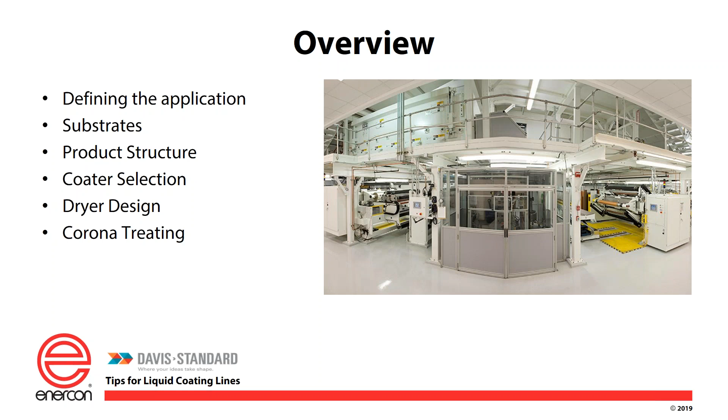In today's webinar, Lee and Tom will cover the key areas which can make or break a liquid coating line's success. They'll look at the importance of properly defining the application and understanding how the substrates and product structures influence equipment selection. We'll also look at the role of corona treating in ensuring coating success. With that, I'll pass it over to Lee, who will begin our presentation.

Good morning. For this presentation, to optimize for your application, we wanted to focus on the product structures, which is your application at the end. From these product structures, as we dissect through them, we'll determine the proper machinery and equipment to get you to the new lines you need today. In looking at the structures, we're going to be looking at the coatings, the surface treatments of the substrates, the drying, and the web handling.

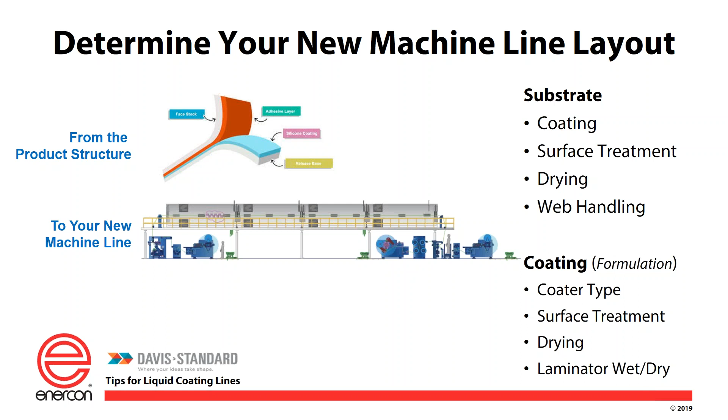Once we get to the coating parts of the structure, we're going to be looking at the coater types, surface treatment again for the coatings, drying of these coatings, and laminators, wet or dry. Next, here's a generic product structure.

For today, we started with just a basic label structure. So what we're going to look at are the substrates to be coated. Here you're seeing a face stock and a release liner. In what order are these webs to be coated?

We'll discuss that different webs can withstand different temperatures, different solutions, solvents, waters. So we want to figure out which is the best order to coat these and bring them through dryers. Based on that, what are the limitations of the different webs? Basically your temperatures or your tensions.

For instance, some of your film substrates, like a BOPP, will soften above 160 F, so we want to be very careful bringing those through the dryers. Tensions - let's talk about a softened BOPP. We can stretch it, or like a tissue, we can rip it easily. Boards, obviously, we can pull a lot more tension.

Now, what are the parameters for the web handling? For each web, we need again to look at your tensions. What are the roll diameters? What are the roll weights? That'll help us determine your unwinds and rewinds and the tension set points for the entire line.

And then what are the surface treatment level requirements? On these, do we corona treat them? Do we flame treat them? Are there no treatments? The actual treatment levels and such will be discussed by Tom later.

And then what are your formulations? We'll look at the different coating solutions that are applied. In this structure here, you're seeing an adhesive layer and a silicone layer, and we'll tear those apart. And then how do they get applied to the web? Those are the different types of coaters that we would select, and which one's the best for that particular application.

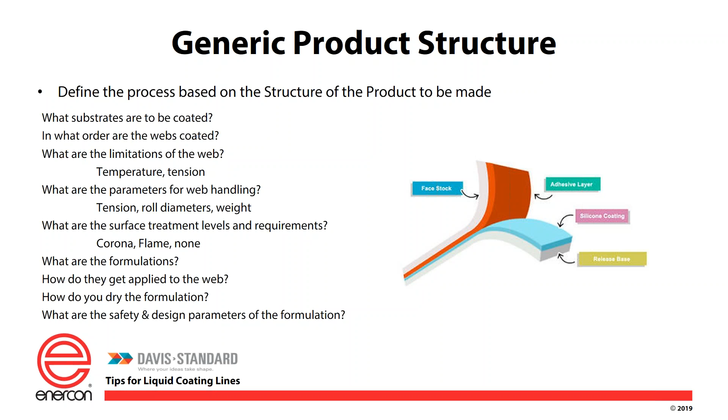And then we'll talk about how you dry these formulations. We have to understand the basics of the coatings and the substrates, and when they're combined, what it would take to get them through a drying process or a curing process. And at the end, what are the safety and design parameters of the formulations?

Here is the same product structure I showed you, and here's how we break it down and figure out how we're going to bring it through the machine line. First, we're going to use the release liner, which in this case we'll say is a film substrate. We'll call this the liner, and it will be the part that we'll be coating with the silicones.

So on the main unwind, we're putting the film, going to coating station number 1, we're going to apply a silicone, and then we're going to go through a dryer and dry or cure, depending on what stage of this formulation we're in, and create a silicone-coated substrate.

We'll make this a 2-pass line, so now we're going to take that coated substrate off the winder, put it back on the primary unwind again, and apply a laminating adhesive to the top of the silicone. In this case, we're going to laminate it to a paper web, which is your face stock.

The reason we're doing it in this order is the face stock is usually the expensive web that's used for the labels, the one you're going to be displaying, and you want to put that through as little stress as possible. Going through dryers, tensions, and laminations could stress these substrates.

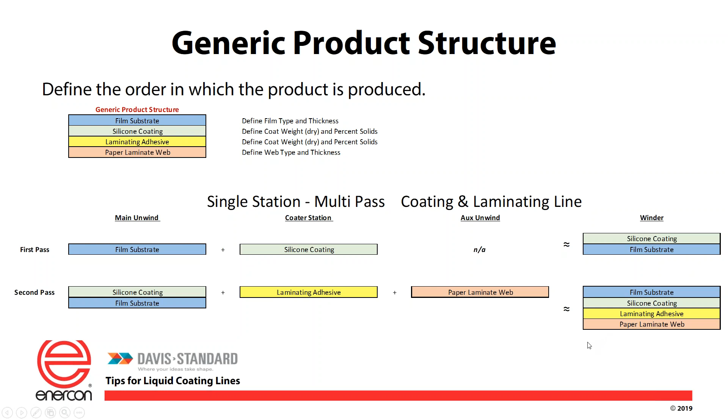So on that second pass, once we laminate it to this paper, you'll see on the primary winder we created that generic product structure: the substrate being a release liner, the silicone coating, then your laminating adhesive, and then your actual face stock, which in this case was a paper laminate web.

Now we'll start with coater selections. So with the silicones or with those adhesives, what we need to look at is the basic parameters around the requirements of each of these coatings.

At what line speed are you going to run these? Speed will determine tensions, style of coaters, length of dryers, and amount of temperature and dwell time in a dryer. Then we're going to look at what substrates.

What's the best coating application for a substrate? If it's film or paper, a gravure coater, a slot die coater, or a multiple transfer coater works great. However, if we chose a fabric or a tissue, you really don't want coaters that create back pressure, because it could penetrate through the web itself. So we need to isolate what your substrates are for each product.

And then what's the finish criteria? At the end, what is it you're looking for? Is this going to be an optically clear product like a window film? Or is this going to be a tape and label that's paper that you don't see through? Or a label that has a film with print on the back side? So we need to know what your finish criteria is to pick out the right equipment.

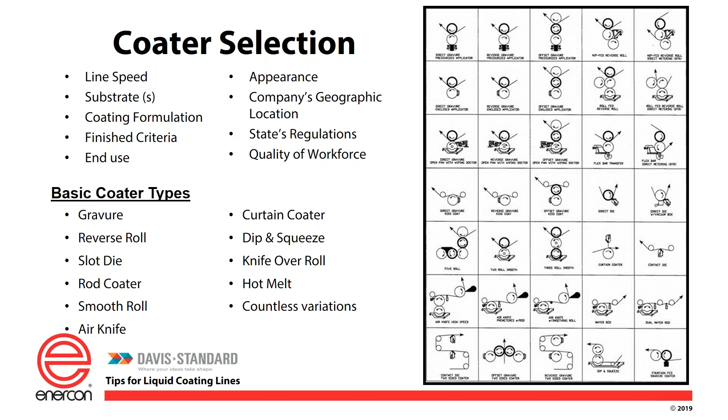On the coating formulation properties, all right, I mentioned to you a minute ago the silicones and the adhesives. What we look at there is what are their functionalities. We want to identify these. Silicones are typically a release coating. Adhesives, they're typically going to be a tacky, or it's going to stick to a web or hold a label to your products. We want to know what the end functionalities are to identify them.

And then what is the coat weight? How much coating are we applying to the substrate? Now, this is usually going to be either a wet or a dry number, and either or we need to know them both so that we know at the end on the winder what we're winding up.

During the drying process and application, what's that thickness going to be, and what are we putting on? We figure this wet film thickness out based on the solids content of that coating and the actual amount of coating you're asking for.

And then density will play a part in that. Most adhesives are slightly above a 1. Water is a 1 density. Adhesives are like a 1.1, slightly heavier. Whereas some solvents, if I'm using a solvent-based adhesive, are much less in weight. A density of 1 is 8 pounds to a gallon, 8.3, where adhesives are about 9.5 pounds. Some solvents can be as low as 6 to 7 or 8 pounds to the gallon. So density has a factor in that.

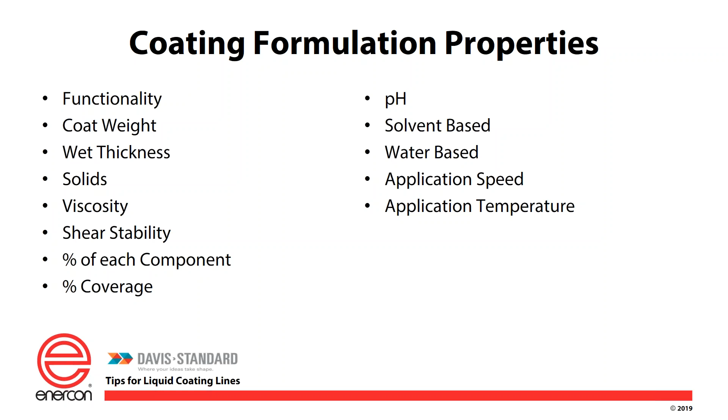You'll find, let's go back to the silicones, 100% solid thermal silicone will carry usually less than 1,000 centipoise in viscosities. But when you start putting additives for controlled release agents, or you get into the UVs where you're putting in some initiators, those viscosities tend to climb. And on a smooth roll coater like the 5-roll, the higher the viscosity, the higher the coat weight generally tends to be. We need more shearing actions. By increasing temperatures on those particular coatings, heating the rolls up, heating the bath up, we could actually lower the viscosities and get you a lower coat weight. So that's where we're at with your application temperatures.

You put it in, you run that coater day in and day out. However, if you're going to run multiple products on the same line, that requires different types of coater applications.

Whereas if this was a dedicated coater, we'd have to roll that gravure roll out with a maintenance crew, and you're down probably 45 minutes to an hour.

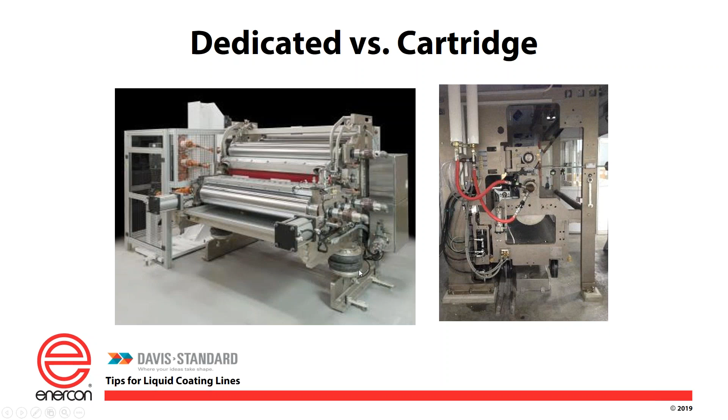We need to look at the absorbency. Paper, if it's clay coated, has little absorbency. If it's release coated with silicones, it has little absorbency. But if it's an open face kraft or an open board, your absorbency actually increases, which means as I apply a liquid coating to the surface, some of that liquid will migrate down into that substrate. That requires more energy in order to get it out during the drying process.

It also determines what type of coater. If it's very absorbent, like tissue is, we don't put a backup roll or a die against a roll with pressure. Something like this needs a very low backing pressure, like a tissue would be a kiss coat. So we would put 2 idlers. The tissue would go over a gravure roll with nothing pressing it down other than the idlers on both sides, or maybe a die in between those 2 idlers, applying the liquids to it.

Whereas film holds out great. It's got very low absorbency. Most films have zero absorbency, but yes, there are some hydrophilic films out there that do take on absorbency, and we need to know which ones those are, because that affects our drying processes.

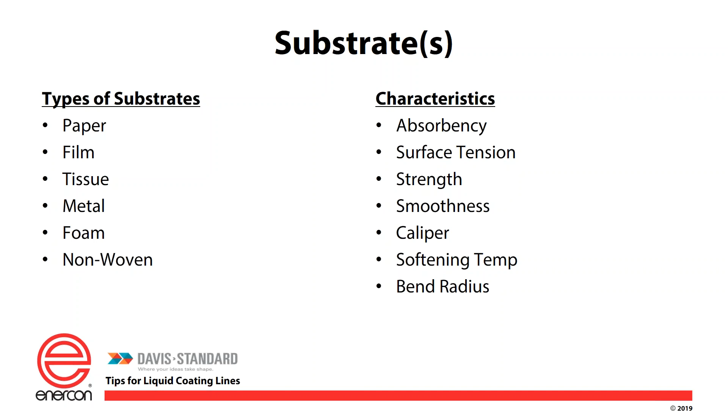Softening temperature - I've mentioned this quite a bit already, heating up different substrates and softening them to the point where they can be stretched. Bend radius again goes back to heavy board versus other substrates. With a heavier metal, we'd use a larger diameter to get the right bend radius so we don't crease the metal either.

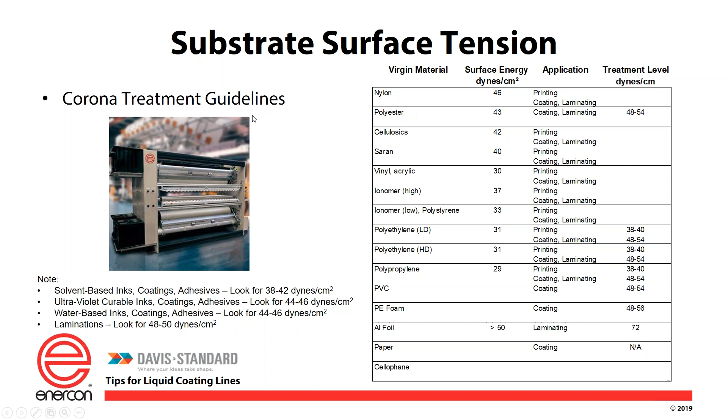What the differences would be - let's say on a film that's going to soften and become very frail, we want to support it, so we'd use a roll support dryer for that. Whereas with paper, I can use flotation, which allows me to apply heat from both sides more efficiently and aggressively, so I'd use a shorter dryer.

Coating formulations - again, we want to know what that formulation is so we can determine how much heat to apply and the evaporation rate to dry the product, turning it from liquid to gaseous form without disrupting the top or other layers. If you dry it too fast, you can get a skin formed on top, and the liquids underneath can't get out, so they boil, blister, and break through the surface. With something like that, you want to dry more from the bottom on a thicker coating than on top, and maybe even have a quiet zone with no drying on top.

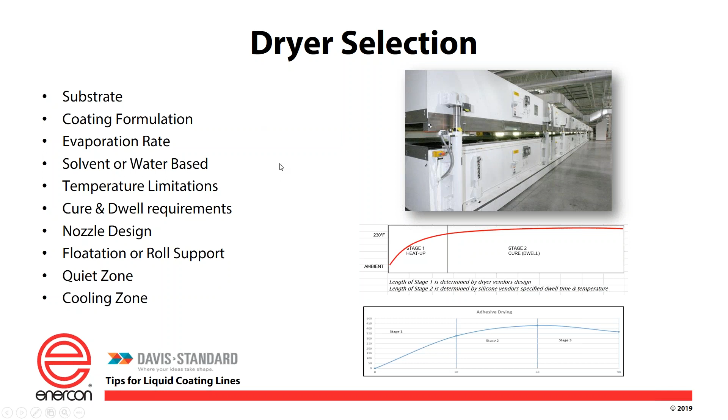The two charts there are the next two slides, so we'll move on to those and I'll explain them to you. In silicone, what you're looking at for a dryer is you need to heat the silicone up to a temperature, and you need to maintain that temperature for a period of time - that's your dwell length. Now, those numbers will be given to you by your silicone vendors for each product.

So if it's water-based or solvent-based, stage one is not only heat up, but also evaporation - we get rid of that. But most solvents or silicones today are going to be 100% solids in this talk. So we heat it up, let's say 230 degrees Fahrenheit, and we keep it at that for a dwell time.

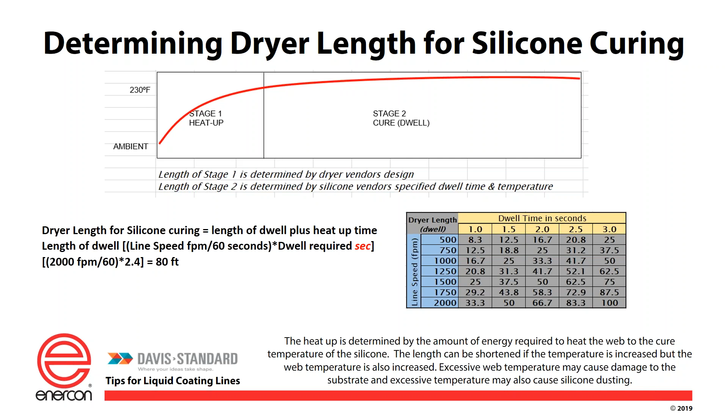Okay, next slide now is for an adhesive coater or other types of coatings, but in this application we're talking adhesives. Here I don't need to cure it - I need to get rid of the liquids.

I need to dry it down to a very finite dryness at the end, usually less than 1% moisture left in there. In stage 1, we're heating the web up and heating the coating to get to the point of evaporation.

As a liquid evaporates, it creates a cooling effect. So in stage 1, we can run enough temperature to create all this, actually higher than we can in stage 2, because stage 2 is drying with very little moisture left, so I don't have the same evaporative cooling. I have to run lower temperatures for that zone.

So stage 2 is where I have very little evaporative cooling, but I still have moisture to get rid of. Then stage 3 is where I do my final drying.

If I'm going from say 5% down to 1%, at this point I have no evaporative cooling, but I have to get that moisture out, and I can't boil the coating that's there. It'll blister in a different form, whereas in stage 1 it creates a skin when it boils first. Here I'm boiling this almost solid, which creates craters. So stage 3 is where I'm trying to get the final moisture out at a different temperature level.

So these are the two different styles of drying required for different coatings, which help us determine dryer lengths, dryer parameters such as nozzles or designs, and other units like that.

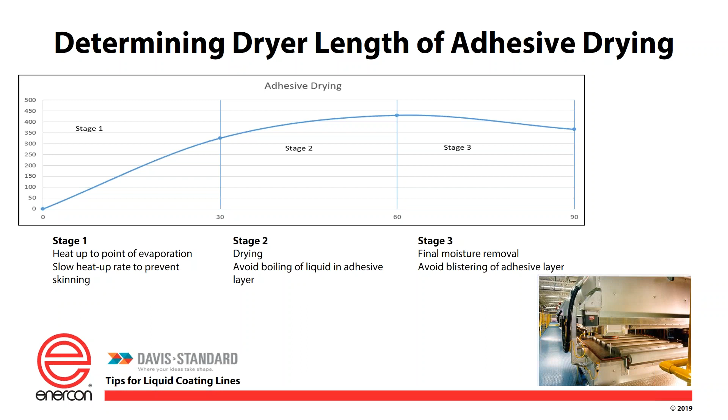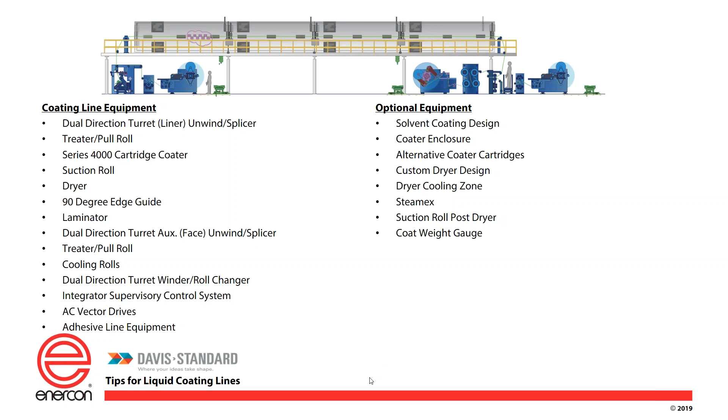Now, this is like an 80-20 rule. 80% of the time that's true. There's always an exception to the rule, so that's your other 20.

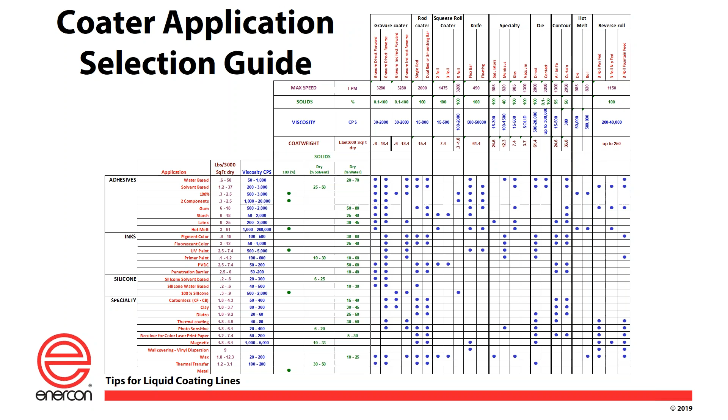We do solution coating and extrusion coating, so we can handle webs from the thinnest to the thickest, from plastics up to metals. We offer the total solution, which means not only will we engineer and design your machine for you, we will install it, start it up, train you, and maintain it over the years with our field service technology.

For any maintenance needs, you can give us a call. Tailored design - we don't offer just everyday cookie cutter equipment. We are known in the industry that when you come to us, we will tailor this machine to give you the best product for what your needs would be.

And global support - we are a worldwide corporation. We have manufacturing throughout the world. We have our service people stationed throughout the world, and we sell to the whole world economy. We're not just a U.S.-based company.

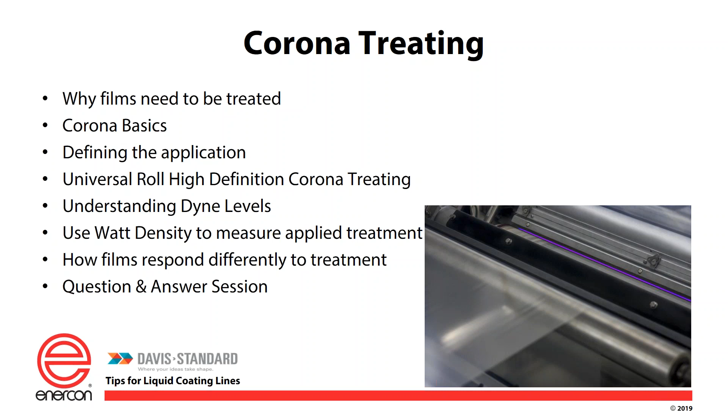So the number one reason why we're treating these films anyway is you guys have lazy film. The films you have are all low energy. So when you buy a polypropylene or a polyester or a polyethylene film, and you're trying to convert it, and like in Lee's case, we're trying to get a silicone coating to wet that surface, that pre-treated material, as Lee identified in an earlier slide, relative to these starting dyne levels, is just not adequate to allow that silicone coating, for example, to wet the surface.

Now why is that? Well, just a couple of reasons. Number one, it's simply a low energy surface to start with, meaning there's no polarity on that surface. It's just a very neutral surface. But then we have other problems, right?

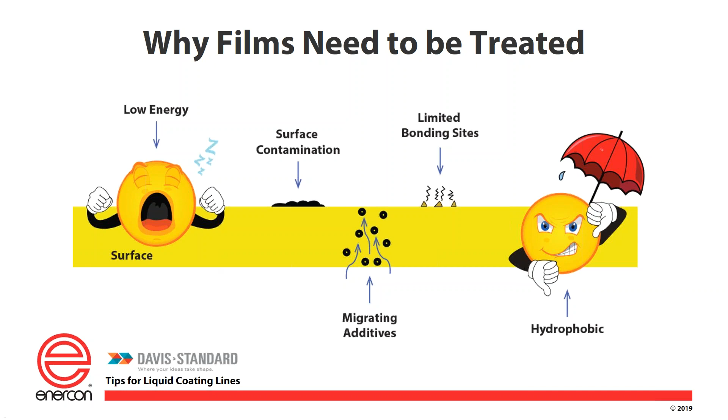We have surface contamination that might be as a result of migrating additives, slip additives, anti-blocks, possibly colors, whatever it is. Some things maybe post-consumer - maybe it's a post-consumer product, there's 30% recycled material in there, and within the scope of that, there were some additives within those categories that now are sitting on the surface, which limits the surface's ability to bond and limit the surface's ability to wet the liquid. So the surface treater, corona treaters or flame treaters, they're there to correct for all these issues.

So this is kind of what this slide is showing, right? We're showing a corona treater station and your web with all this baggage - we've got additives, we've got post-consumer, we've got age. The film you're running might have been sitting in a warehouse for any number of months or maybe even a year before it's being converted. So all that baggage that's on that film, we've got to manage that. Somehow that's got to be addressed before it gets into the coating head.

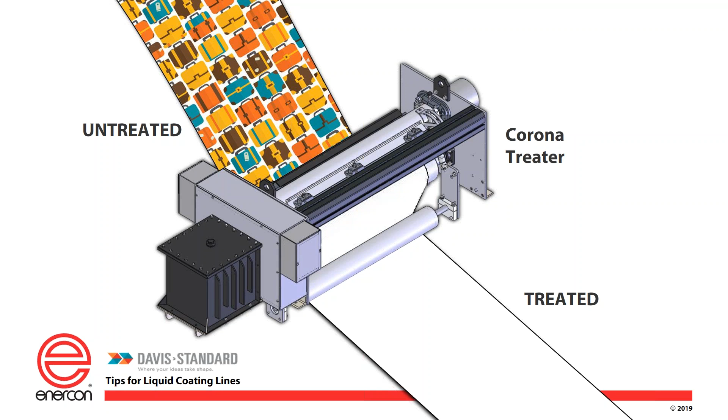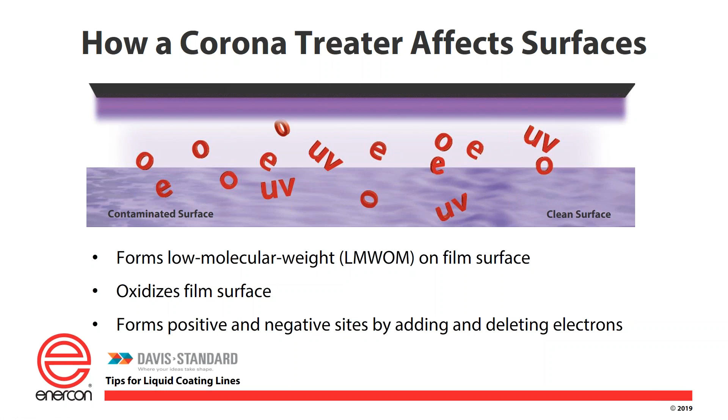So really what happens here is we have all these low molecular weight materials on the surface of the material, and the corona treater takes that material - we oxidize that, we put oxygen into the surface, we go ahead and form these positive and negative sites by adding and deleting electrons in the corona field. And that cleans the surface, of course, get rid of some of those migratory agents that are on there. And when we do all that, we end up now with a surface that goes from a non-polar surface to a polar surface, one that was kind of dirty and not suitable for silicone coating in this case, but now is. The corona treater is doing its job - it's cleaning and functionalizing that surface so that the coating process does what it's supposed to do.

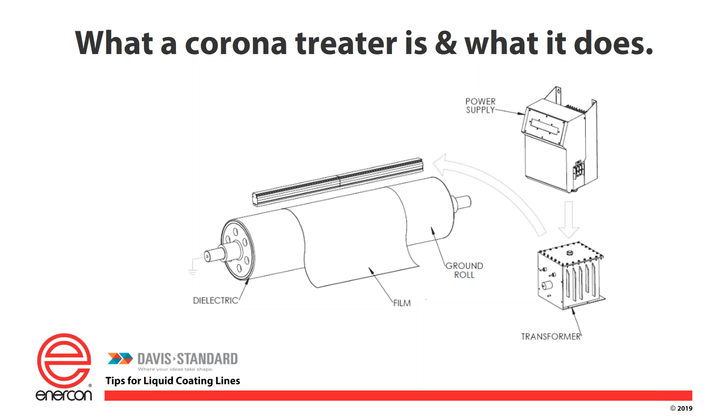For example, in a propylene material, a pre-treated polypropylene, you might get that material coming from the extruder at maybe 36 dynes. Then the corona treater, after that 36 dyne material passes through it, can increase the surface energy to maybe 40 or 42 dynes, depending on various conditions. But that's really what the corona treater is doing, is ionizing air. That ionized air then creates a functional surface on what otherwise is a non-functional film.

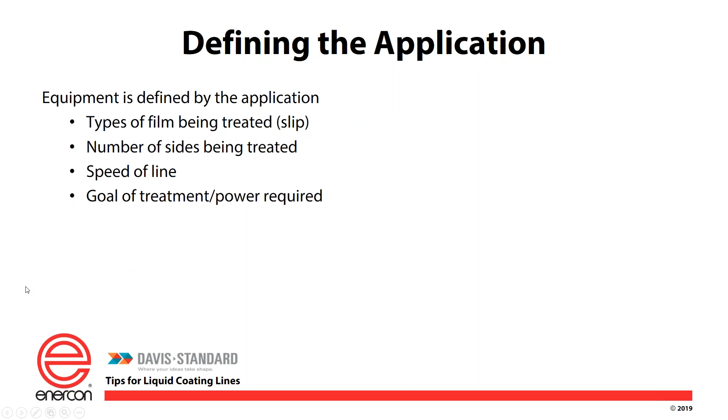We need to know how fast the treater has got to accept the film going through it for treatment. We need to know what the goal is. Are we treating this simply to get some material off so the surface energy comes up for a solvent coating, or are we doing it for a water-based coating? Are we doing it for an energy-cured coating, like a UV coating? These are all the questions you hear from us when you contact us for a quote. That's why we're asking them. We need to get an understanding and define the application a bit so we know whether the treater is going to be a 5 kilowatt treater or a 50 kilowatt treater.

As a lot of you know, there are a lot of different versions of treaters out there, it seems like everything else, right? We used to just have two choices when you ordered a coffee. Did you want it with cream and sugar, or did you want it black? Well, today, like everything else, corona treaters have grown a bit in category. So there are different types of corona treaters used for different types of applications.

I won't get into every little nuance here because we're focusing on the systems typically used in our example, a silicone coating application. So I'll focus there. In that application, and many similar, these universal high definition treaters tend to be the ones that people choose. So what are they? What makes something a universal high definition treater?

There's two main things. Number one, the electrode is actually ceramic. So the electrodes within the electrode assembly are a ceramic insulated electrode. They're designed to be used in various applications. They can treat standard web, paper, poly, laminates, what have you. But they can also be used to treat conductive substrates. So if you're running a product that's, say, a metallized polyester on one side, and you're going to marry that, or coat that surface, this universal high definition treater can certainly do that. So it has a lot of capability and flexibility.

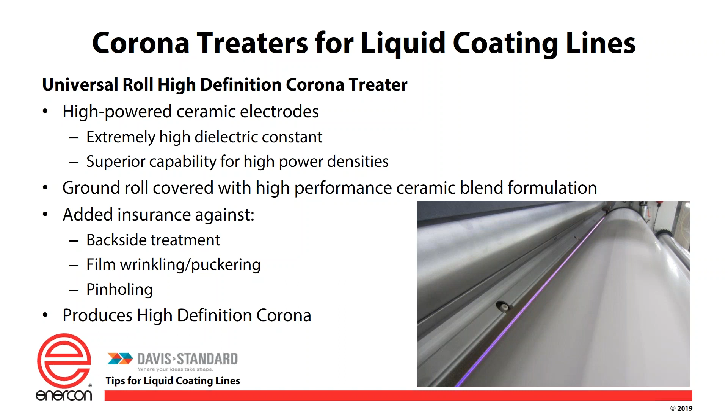So how do you measure the effectiveness of treatment? You could do a webinar easily just on this topic alone. So on this slide I ran everything together and gave you the high-level approaches. The number one message I want to leave with you in this section, the thing I don't want you to forget: dyne testing, which we all use and most of us are quite familiar with, is the industry's standard method for determining the effectiveness of the treater.

So to measure the surface energy of a film with a dyne test, we can do it with pens, with sterile cotton tip swabs, or with a drawdown or Meyer rod method. In our opinion, dyne pens are best used for initial testing.

Let's go all the way back—think with me for a minute—to the early slide in Lee's presentation where he had that list of materials with generalized dyne numbers for the coating. Picture yourself as an operator on a coating line. Your inventory group just brought a bunch of rolls over to load onto the machine—let's say they're rolls of polypropylene film.

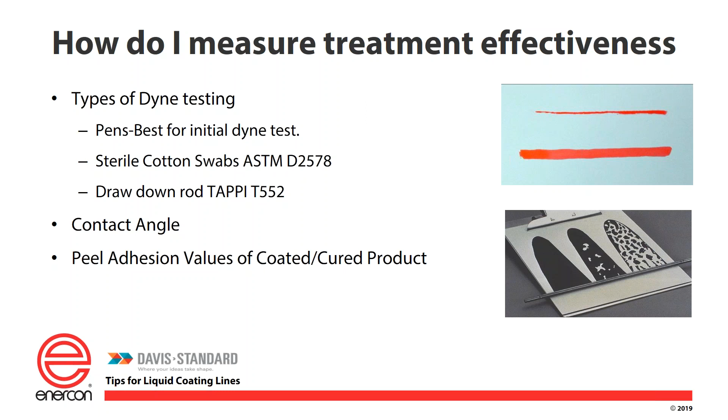So here's my controversial slide of the day. Dyne levels do not guarantee adhesion. I just came back from a few days visiting with customers, and I must have mentioned this at least in 3 different meetings this week. It's a little counterintuitive in our industry, because just by happenstance, we take a substrate that's 36 dynes, treat it to 40 dynes, put some silicone on it, do a peel adhesion test, and hey, look at it, it's great, it works. And everybody thinks 40 dynes equals this great adhesion.

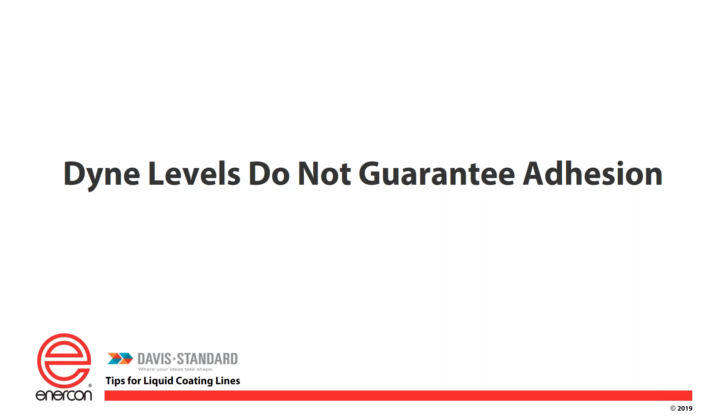Well, not necessarily, right? Dyne numbers are measurements of wetting - adhesion is not that. It's fortuitous and quite helpful to us that they tend to follow along in a step-by-step manner. But the truth is, many of you listening now know this on your own - you've had the experience where you treated the substrate, applied the ink or coating or adhesive, and didn't get the result you want. Yet you may have recorded the dyne number that in the past looked good. So at that standard you'd think, I don't know what's going on here, something's wrong - why did I get this dyne number and now I don't get the result I want?

So what do you look at when that happens? You're looking at what kind of output power did you have, was your watt density where you needed it to be, how am I controlling this treater? These two methods are the most common. You can control the treater by simply walking up to the controller and raising or lowering the kilowatt output. Many of you do this - you know the old saying, raw power, right? If 1 kilowatt is good, 10 kilowatts has got to be better.

Sometimes that happens, but it's kind of the rare case. Really what you want to do is suit the output power to the material. Let me give an extreme example: let's say we're running polyester film on the silicone coater, very thin gauge film, and maybe we're in a mode where we're running slower. Maybe the job requires that for whatever reason, so line speed is a bit slower than normal. But we decide that even at the slower line speed, we're going to give the treater output 100%.

What happens there is you'll find many times some odd things can go on with the web. The web gets into the treater, it's running at a lower speed, gets a lot of dwell time, a lot of power, and now the web starts doing odd things. It can pucker, it can wrinkle, it can get a big static buildup, things of this nature. And then when the web exits the treater, more problems happen. The coating doesn't look right, it doesn't wet properly, maybe it's got an orangey peel look or something. Something in that process is not working.

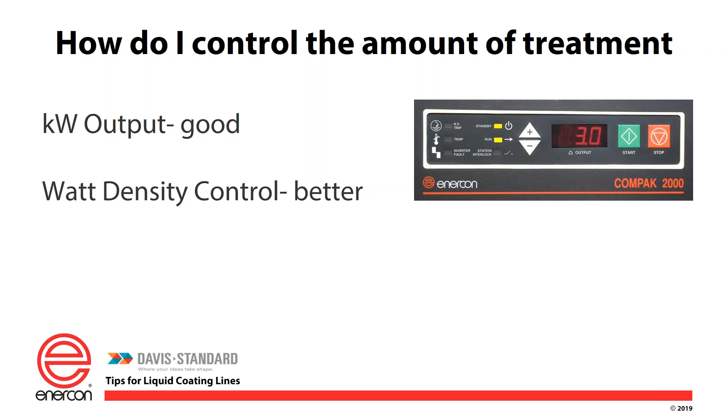And the watt density is something we're going to go into right now. So really what we're looking at is we take into account the width of the web, the width of the electrode if it's a fixed width electrode, the line speed, the number of sides we're treating, and we calculate all this out and come up with the amount of energy based on the line speed and the web width - so how much power over how many feet squared of material through the treater per minute.

So you might be asking, well that sounds great, Tom, but so what? Well, this is how all corona treaters are sized. I don't care if the corona treater is a ceramic electrode corona treater, a bare-roll corona treater, a metal electrode corona treater, or an atmospheric plasma treater - these are all sized in the same fashion, done the same way.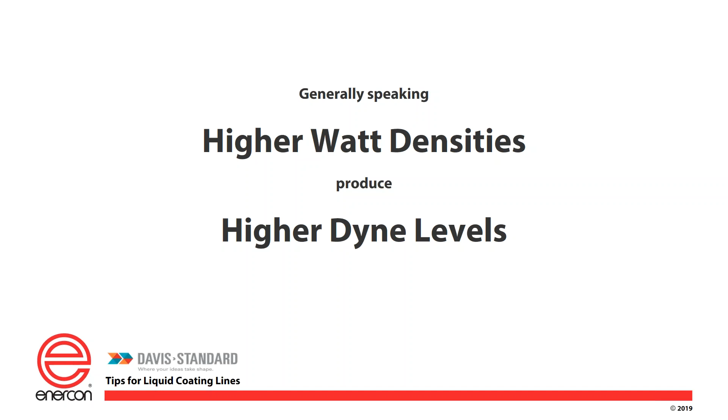Generally speaking, higher watt densities produce higher dyne numbers. We've all seen this, right? We have practical experience that tells us this. Maybe the data on this slide should say, generally speaking, higher watt density produces higher dyne levels, and underneath you say, duh, right? That's what everybody's thinking. But really, that's not always the case. Your own experience shows this. So let's go on to the next slide and dig into this a little bit.

You can't use a watt density to predict your dyne levels. Many of you want a closed loop system that says when the corona treater's on and I run at a watt density of 2, I'm gonna get 42 dynes. Believe me, if I could do that for you, I would. It's not a question of equipment or technology that doesn't make that happen. The overall reason it doesn't happen is the material.

Over time, somehow the material in this equation - the polyester, polypropylene, polyethylene, styrene, whatever it is - kind of leaves our thoughts. We kind of set that aside, like wallpaper. The material's got to be there. In our example, we're making silicone-coated product, so the material's got to be there. We've got to coat something, so we kind of set that aside.

Sometimes we set aside the fact that the material changes. We might be coating one type of film one day, and the next day we're still coating but a different type of material, and we assume they're all the same. So if I ran 2 watt density yesterday, I should be able to run 2 watt density today, and predict the dyne level is going to be equal. That's not really the case. Next slide.

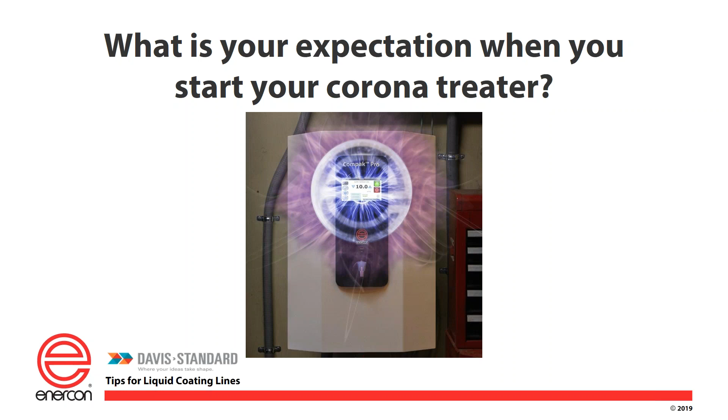So what is your expectation? When you turn your corona treater on, do you just expect it to magically give you this dyne number? Because if that's your expectation, there are going to be times you're not going to be happy. Do you expect to see that same result every time you run the film through it? Again, if you do, your expectation may not be met. So why is that?

There are all kinds of reasons, but really the main reason is the film structure and what's going on the surface. Polypropylenes don't treat the same as polyethylenes, that don't treat the same as styrenics, that don't treat the same as polyesters or nylon. And again, we know this.

Let me give you a drastic example. On one end of the scale, I have a polyester film. Going back to the beginning of the presentation and Lee's slide, that polyester film came to us at probably 38 or 49 without any further treatment. On the other end of the scale, if I take a polypropylene of the same gauge, same width - from 10 feet they look the same - that polypropylene isn't anywhere near 49. Just by that reality alone, is it right to expect that at the same watt density, you're going to end up at the same point?

That's just not going to happen. The dyne level you start with matters, and the substrate matters - the time the substrate's been around, how old is it, what additives are in there, is there any other surface contamination in there? So many times on converting equipment particularly, you hear this.

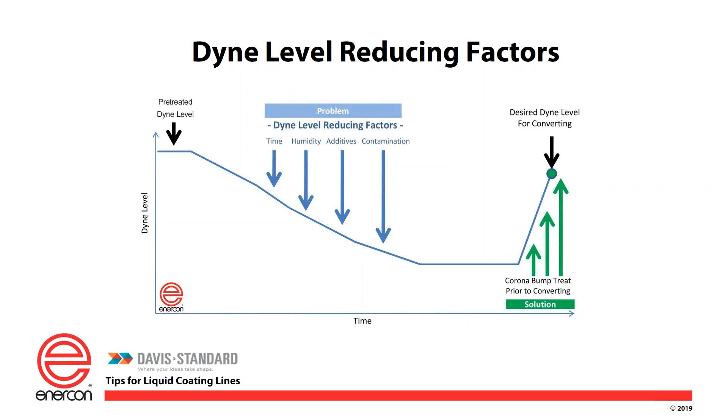So if you do that and you bump treat before you coat it - and we had his line schematic showing a couple treaters in there - that's really what he's doing. He's unwinding those films and bump treating them prior to the coating process. Next slide.

So here's a great example of what I was referring to. We have 3 different films: a pre-treated polypropylene, a polyester, and a polystyrene. We treated them all exactly the same, with the exact same treater, at the same power, a 1.1 watt density.

So what results did we get? On the pre-treated polypropylene, we didn't get much, maybe 38 dynes or something like that. On the polyester, look at that. At a watt density of 1.1, that's a big winner by the dyne category. We got 45 dynes on the polyester. And the overall winner altogether in the dyne race here is polystyrene, where we went from the low 30s up to 60 dynes.

So if all we were focused on was just this dyne number, like we're racing towards dynes, then clearly the winner here is polystyrene. But isn't it interesting that we got this great number, but the treater didn't change? The treater is the exact same device running at the exact same power. Let me ask you guys out there, what in that example changed? And of course, the answer is the film changed. So different films treat differently.

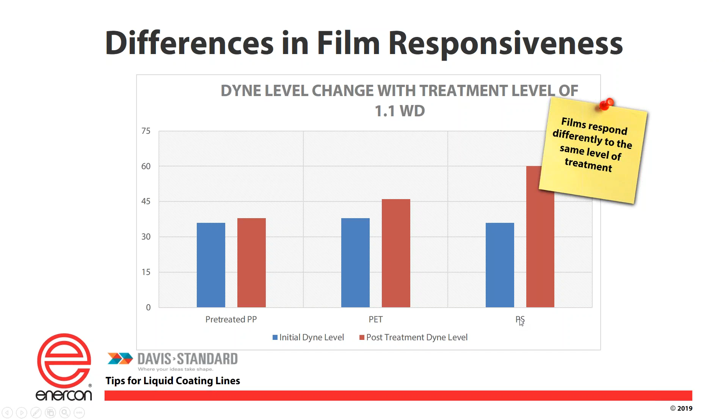Again, really a good example here where we had BOPP versus polypropylene, and you apply different watt densities and you don't get the same dyne level results. It's really the same category. Depending on the film structure, additive loading, age, and so forth, some films respond better to more aggressive amounts of corona treatment. In this particular case, a watt density of 2.2 gave us one result with one film, and a different result with another film.

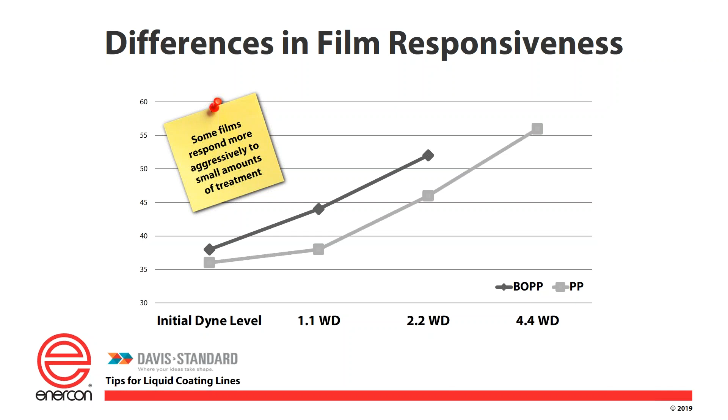And as I go up in power here, at a watt density of almost 4.5, I still ended up getting some benefit. But on the other film, I got nothing — it sort of plateaued out. So the film, folks, makes a huge difference in terms of the ability for you to convert it accurately and effectively. Next slide.

Looking here at a low-density polyethylene and the dyne level change relative to the increase in watt density. Now, the purpose of this slide is interesting in that we have this conversation all the time, and Lee might probably chuckle a little bit at this. Sometimes when we go through this analysis process and we're collecting data from you on application, the comment will come back to us where somebody says, well, I need 56 dynes on this randomized list of materials, or I need 50 dynes or something like that. And where that comes from, I'm not exactly sure.

I'm not aware, generally speaking, of any solutionized coatings or inks, water or solvent based, that are formulated in a manner that requires the substrate to be anywhere near that dyne number. Most of the time, those dyne numbers are asked for because people are making an assumption that they're going to store this stuff, and then in 6 months it's going to be high enough yet that they'll be able to still coat it or print it. There's a lot of trouble with that thinking, least of which is the fact that...

these things don't all decay at the same rate. Sometimes they drop very fast, sometimes they drop very slow. It's like playing Russian roulette with that. You just don't know what's going to happen over time, okay? But even worse than that is it costs you guys a lot of money.

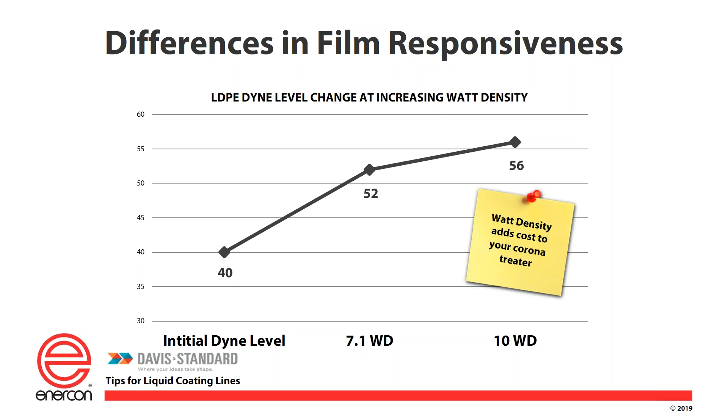So when you don't get a result that you expected, and that happens, right? We go back to our old slide, where we applied a certain watt density, and we may have expected a certain dyne number, and we didn't get it, right? How do you fix that? Or how do you troubleshoot that?

Now, you can certainly call Lee and ask him. You can call Enercon and ask me. But really, on your own, if you feel it's a treater problem, there's a very simple way to deal with this. We'll go through a little bit of this right now.

So has your setup changed? Did somebody go over to the treater while you were running in watt density mode, switch it to manual mode, but not tell anybody, and now you're thinking you're in one mode, but you're not, and so the treatment you thought you got, you didn't. Is that affecting the situation?

Is your line speed changed? Has somebody in the mix gotten a job confused? They're running it either faster or slower than what they were supposed to, and therefore the outcome of the treater is not what you want.

Has the film changed? This is really a critical step here. Many of you will have multiple vendors. So let's say, again, on our example here, silicone coater, we've got a polypropylene web. We've got 3 suppliers, and they're all supposed to provide the same polypropylene, same width, same gauge, same tensile strength, same everything, right? It looks the same, and from 10 feet, these all look alike.

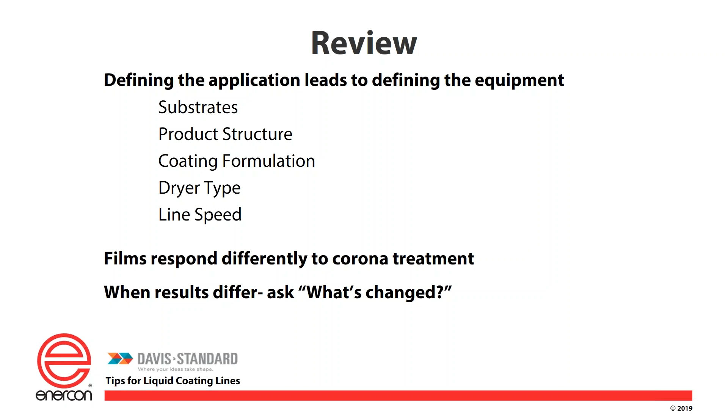The first question that we have is: what coating method is preferred for porous substrate, for example, non-wovens? Hang on one second, let me finish the second part of this question. Porosity of substrate would be higher than 60%.

Well, typically on that, you would do a kiss-style coating, where you would be applying the coating with some sort of a roll, let's say a gravure roll, and you would drag it over the top of the roll, contacting it about 1.5 inches, and you would have an idler on either side. Or if you wanted to be more precise, you would still do a kiss method, but put a slot die instead of a roll there. With some special lip designs, you would bring the web in contact with the die, but not have anything on the back side of it. You'd be kissing it, and you can control the amount of penetration into the porous substrate based on the back pressure, based on the flow rate of the die and the lip openings.

Thanks, Lee. Here's another question. It was mentioned that flame treating is sometimes used on a coating line. Tom, can you talk about when a flame treater might be used versus a corona treater?